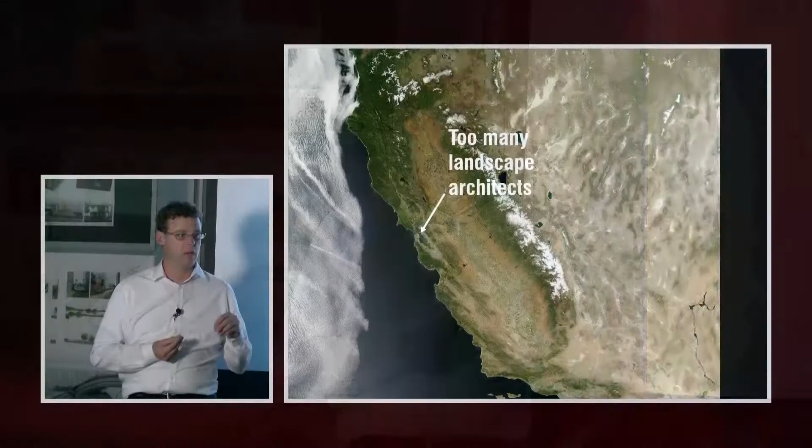I live here, and California is a great big state, but the Bay Area has this over-concentration of landscape architects—probably more than any other metropolitan area in the country, perhaps the world, and I mean that. There's good reasons for that, but it makes it super competitive.

So I had this moment in 2009, maybe 2010. I was teaching at Berkeley. I showed up for a meeting, an RFP meeting for a new park. It was a little one-acre thing, and there were about 50 landscape architects there. There was barely enough room for us in the park. And I looked around and thought, this is not going to work.

You're competing with all of them. How do you tell these guys apart? How do you know what they do? And so that was a moment.

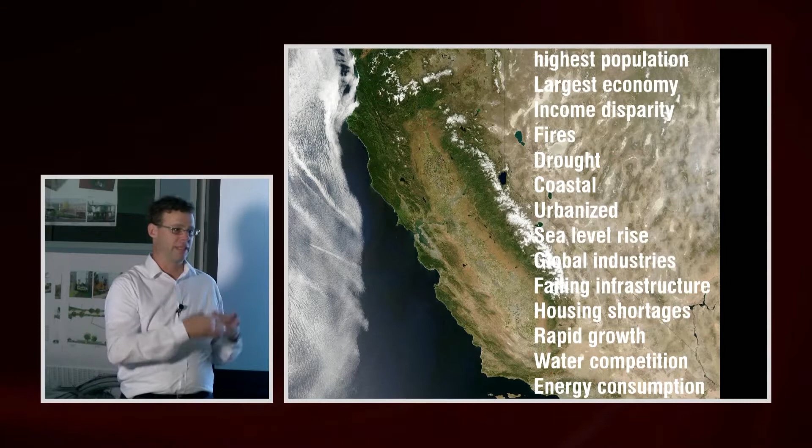California in general is a great place to practice because it's the extreme of everything. It has this doubling effect, and it gets more and more complicated every day. You watch the news and see that, and you think about how it affects spatial planning, design, and the challenges of environment. It really is everywhere, and that's why I say we need really good people and more and better schools.

And so it's at that moment that I started to think about what's the formulation of a firm that's going to have meaning, be effective, attract the challenges, and do work that's advancing and making progress in really difficult conditions while doing interesting things. And so that's where Bionic came from.

The idea is that it has this immediate connotation of something that's alive and something made—we engage in the combination of that every day. It's not about my name, it's about a group or an approach to practice, and there's a certain assertiveness about it. We believe in optimism, in invention, in acting across our boundaries—that was the hypothesis for the kind of firm.

And then with a really simple mandate of enabling life—that was the test, that was our mandate. At the time, it was me, office of one, literally: you start an office with a laptop, a cell phone, and a desk, and then go from there. So that's what I was doing, and at the time I did a bunch of projects that were really just tests.

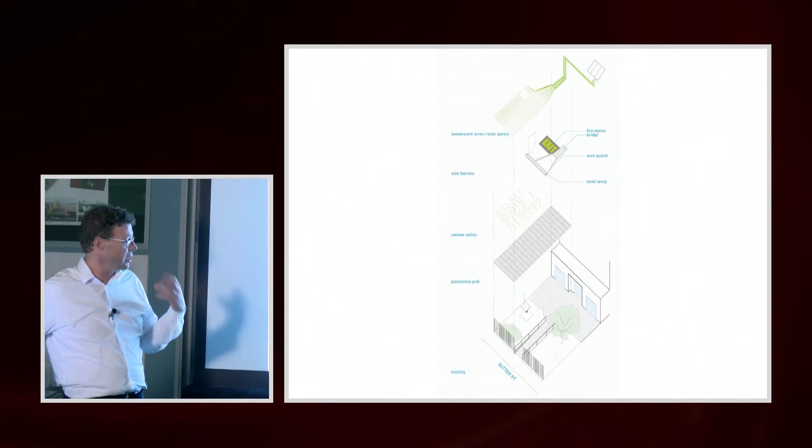This was the first thing I did, for a small art museum located off the street that had a visibility problem. So we designed this glowing terrain that came down off the roof and went over the garden. This is made of stuff landscape architects don't use at all: a 400-watt solar array, phosphor-coated wire, a couple hundred fiberglass rods. It's hooked up to that solar panel, comes down the facade, and that charge makes the wires glow.

This was the first project we did—kind of a visibility project, an unusual sort of sign for this unusual urban space.

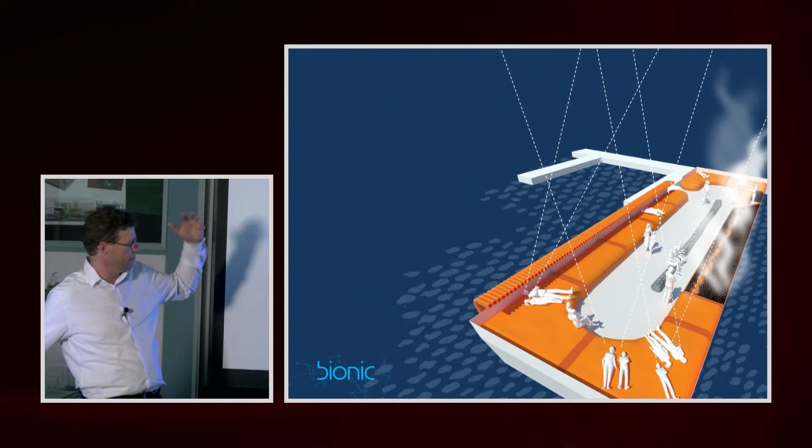This is a competition in Fort Point Channel in Boston, an industrial channel where there's really nothing to see. So this was an idea about making something so you could look up at the sky. It's a combination of a fuel bladder, a log, and a burner—basically a big water bed heated by the fire—and you look up at the sky and see planes landing at Boston's airport.

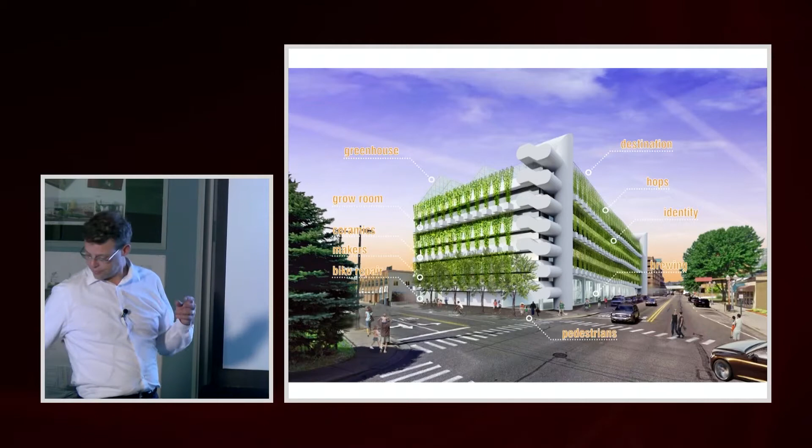This was another one of many competitions I did. This is an exhibition in East Lansing, Michigan, which had a dead downtown. It took all this void space in parking garages and turned it into a hops farm around the outside, occupying the top as a park since it's flat there with no view anywhere.

So this is about reusing old infrastructure and assigning new programs to it.

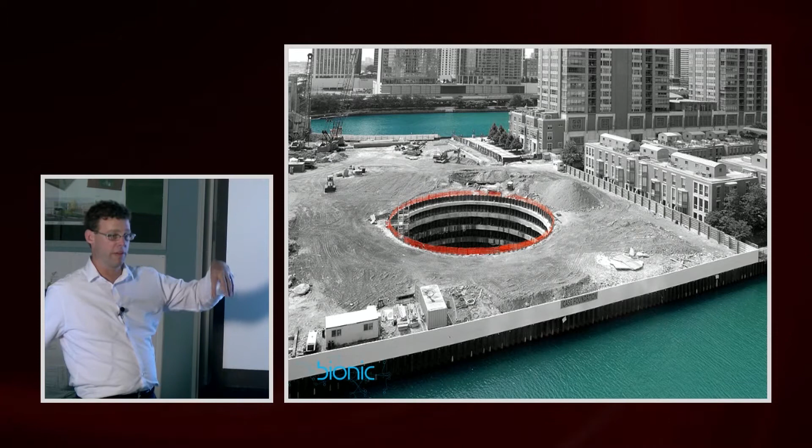This is a competition in Chicago. That right there was supposed to be a mile-high skyscraper by Spanish architect Santiago Calatrava. The financial crash came, and they built this $30 million foundation, but didn't have a project to put on top of it. Super prominent site.

So this is about the transitional use of that site. It was a giant steam ring launcher, taking water out of Lake Michigan and using that big cavity to launch steam rings and make a spectacle, assigning a new purpose to the site. Again, a different kind of adaptation or invention from infrastructure.

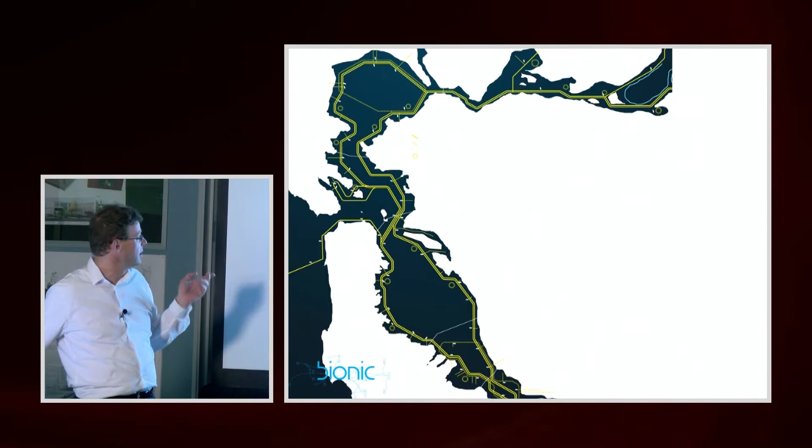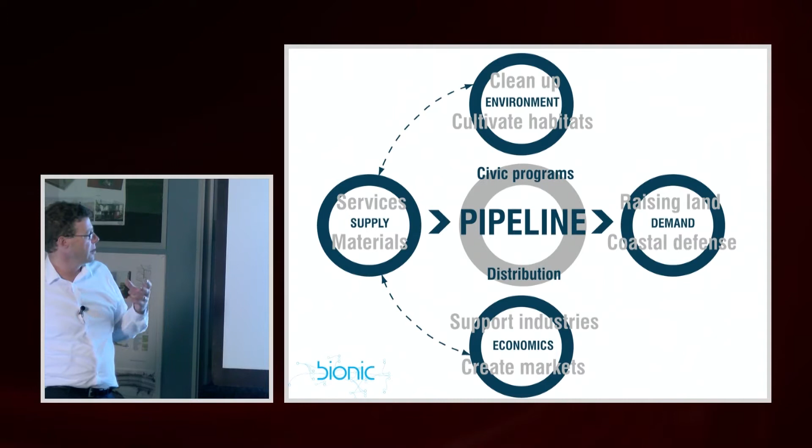This is a competition for San Francisco Bay about using sediment to adapt to sea level rise. It's a very complicated issue, so we were thinking about designing an infrastructure that did more than one thing.

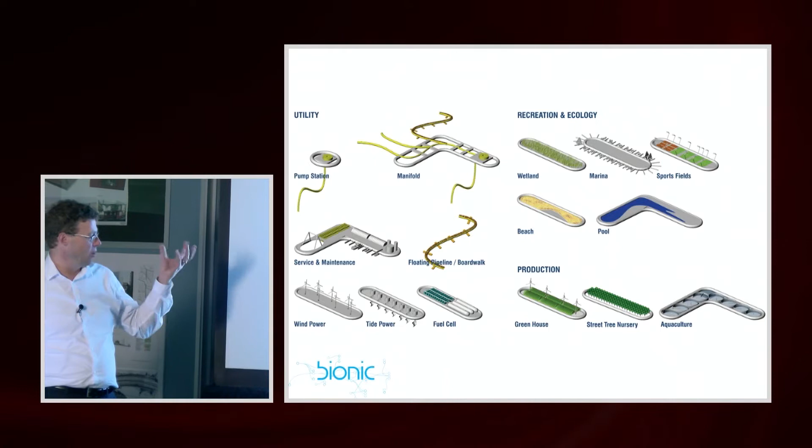It was a pipeline to move sediment, with a whole array of different kinds of apparatuses and purposes on pontoons.

There was a network of islands connected to this pipeline, used for all these functions, really to make the bay, this gigantic regional landscape, adapt over time.

This is more like making a utility for moving mud, but it would have these other functions like disaster response, and it would do the big difficult projects.

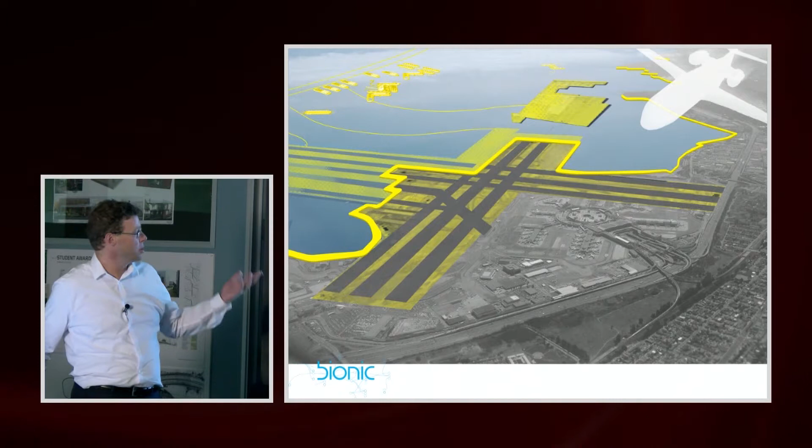What's cool about this is we were speculating on this 8-9 years ago, and today we're in an international competition to do this, and we're thinking about it.

These things take time, I guess, but they have a way of growing in the process. So that's kind of how I started a firm, and it was a good intellectual foundation. It wasn't confused by clients or by financial motivations—it was about testing the thesis or hypothesis of a firm.

Another thing we've done along the way: it's difficult to do something different than what always gets done, right? It's really safe to look and say that's how it was done, so I don't want to risk anything, let's just do it again that way. Maybe we'll change the color.

And we're asking the question—we're seeing the world in a different way and saying that's wrong, that's broken, that needs to be better, it needs to be bigger, and we have to persuade people to see it and think differently.

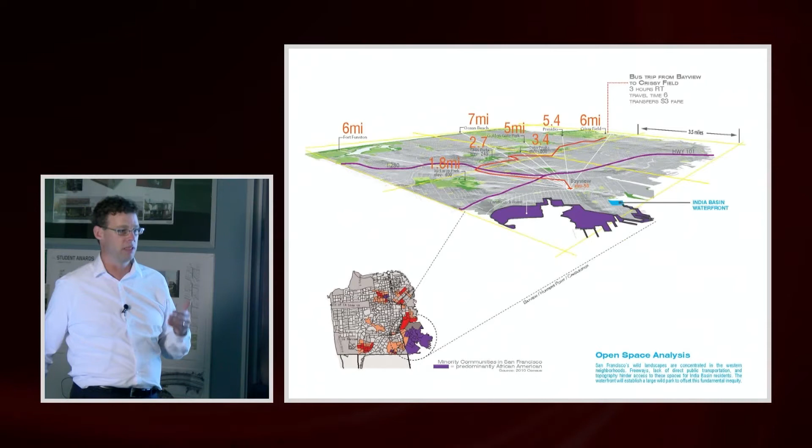As a firm, we've developed a whole set of data methods, and I won't go into it, but it has a lot to do with measuring and seeing things, making an empirical case, and then converting that to design opportunity.

These veer into all sorts of different territory that isn't typical for landscape architects. Here's economic strategies—this is about gathering and harvesting materials from other infrastructure projects so that you could build a big public park in this particular case.

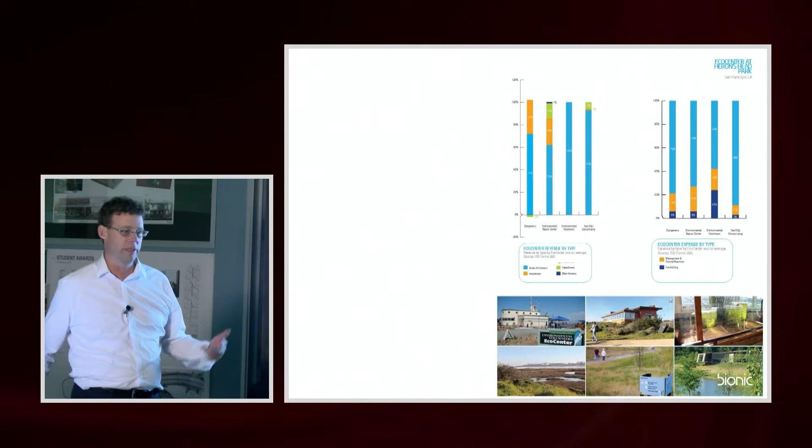We have a whole arsenal of information, branding, and identity efforts we've done. We conduct research—this is for environmental centers all on the West Coast, looking at their data and economics, pulling their tax returns to make a case for what eco centers should be.

This is about going out and measuring, surveying, and talking to people in order to define the form of a wall. And this is work we've done at Fort Mason Center, developing a program for this arts and culture complex—not too far away from here.

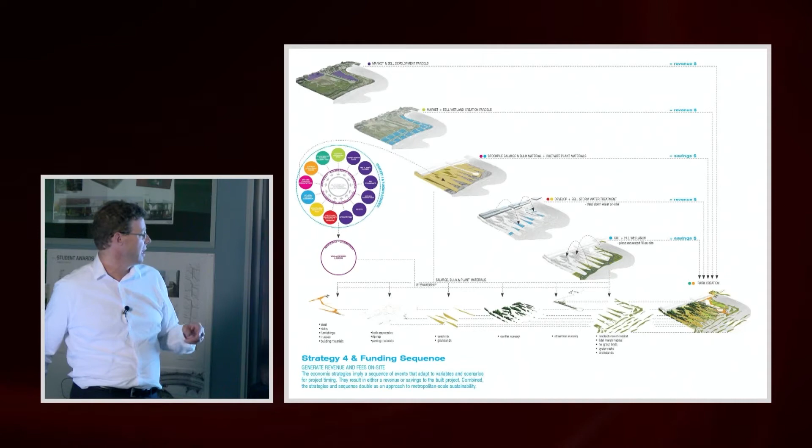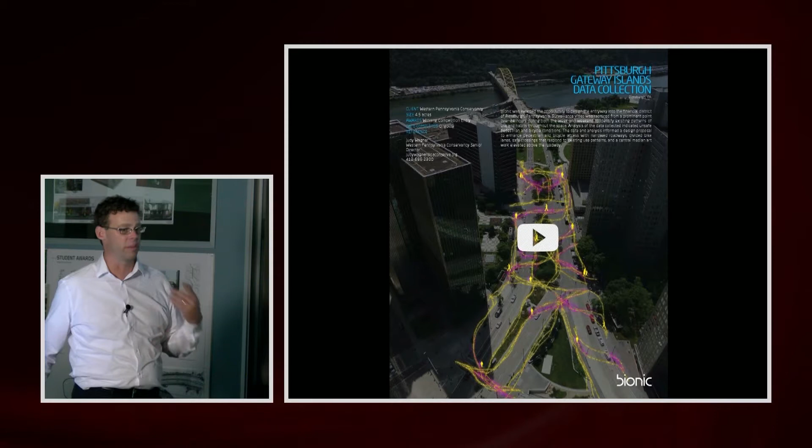So we have a whole set of data methods, and this is time-lapse tracking of pedestrian behavior. We use this for building a base case, a logic for a design departure. It's an important tool, or maybe just a way of thinking about what we're seeing to be more persuasive.

This will just go kind of small to large.

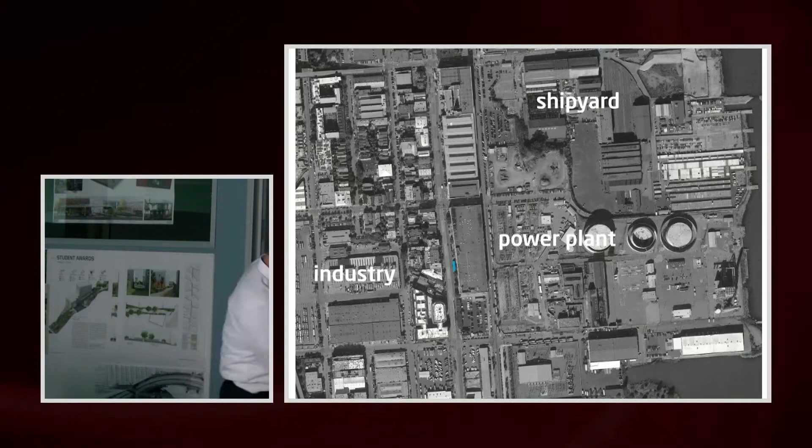That small museum I talked about, the first commission, well they moved to a different place, to Dogpatch, a post-industrial neighborhood where the blocks are 600 feet long, and they're trying to get visibility. So they talked to us about this, here they are right in the middle of a 600-foot long block, and a train zips by. They're trying to get people to come back, so trains and cars zoom by, the train station's down here. So the object is to get people to come back and check out the museum.

So we designed a public space, I don't even like to call it a parklet. This is 3 parking spaces, about $160,000 in 3 parking spaces, and it's designed to have 2 personalities.

So one side has this faceted wall that changes colors, meant to engage the kinetic energy of these machines zipping by on the street. From one side it's white, then the other side flips and turns green, that's what you see from the vehicular experience. From the pedestrian side, it's a tricked out big piece of urban furniture.

So it's got planting, adjustable stools, ADA spaces for wheelchairs, a foot rail, an armrest and a place for your $6 latte, and it's got symbols even encoded in it, like that chevron. You're not supposed to advertise on parklets, but that chevron is pointing you to the gift shop right there, so you can see it from like 200 feet down the street.

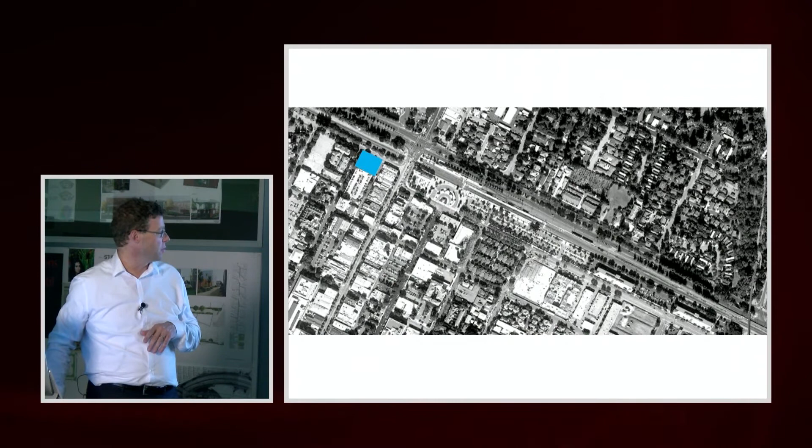It's got lighting, so it's making a public space in a very narrow sliver, and it's part of a big urban system. It's been out there a couple of years, works really well, and at night it lights up. It's got nano coatings to help with graffiti.

This is in Mountain View, downtown Mountain View, right next to a train station, and this is a 16,000 square foot living roof. The setup for this is that it was built at a time when nobody was building anything, and this developer needed to do everything, from lot line to lot line construction.

So the roof is an amenity space. It treats stormwater, has a whole composition of plants with seasonal dynamics, catches the wind, is very animated, and contributes to a mosaic of urban habitats.

I think this project moved incredibly fast, it was done during the recession, one of the first projects that we built, and it adds a tremendous amount of value to this place. One of the coolest things about it is that you can see the Zeppelin hangar at Moffett Airfield, which is one of my favorite buildings, right there.

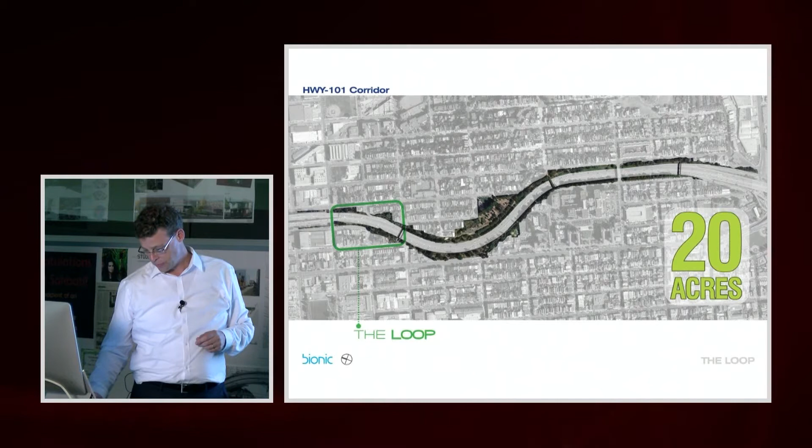One of the other things we've done as an office is, we couldn't find the projects we wanted to work on, so we tried to make them ourselves and make them real. This is one of these.

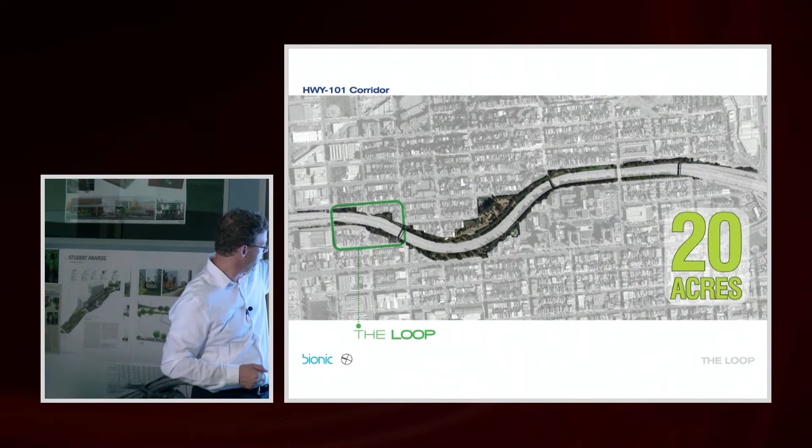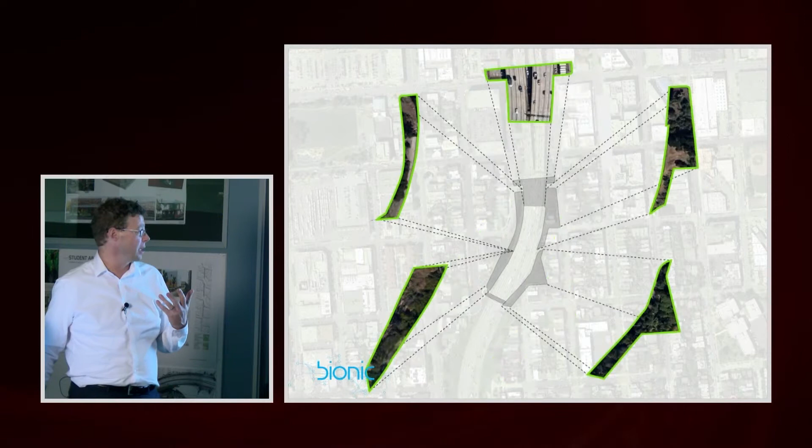So we started this project at a concerned neighbor's dining room table—she made us cookies and we talked about it. We helped them design a project, and the basic idea was that there's all these little patches, so we'd link them up and make a place out of it.

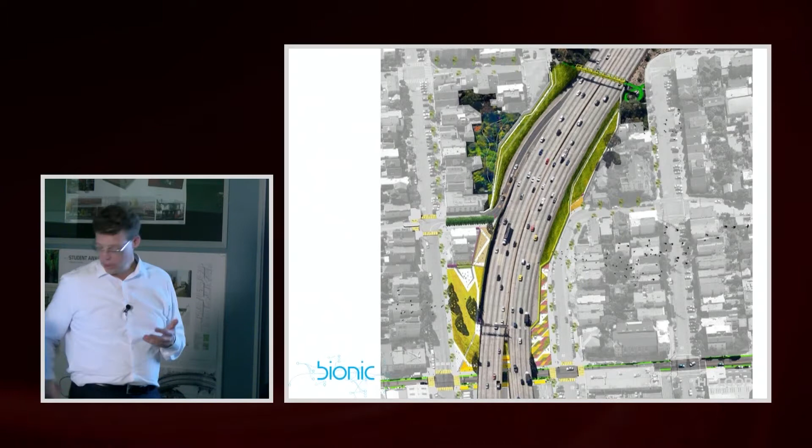This is something we all hate and need at the same time. So it's a very three-dimensional place, with all these different conditions above, under, over, and around a freeway. We generated renderings and helped them for years.

About a year ago, we got to a point where we helped them raise a couple million dollars, and now we're designing the first phase of it. So you start small, with ideas, and it's through our own ambition—putting ideas out there and visualizing them, helping people understand them—that motivates people, creates funding, and makes things happen.

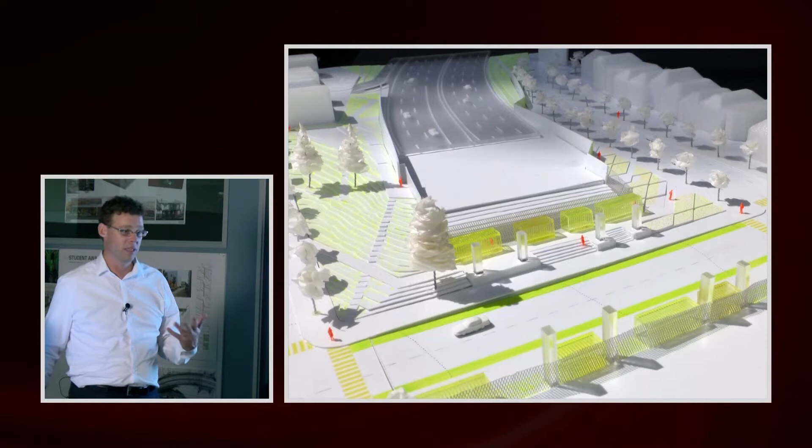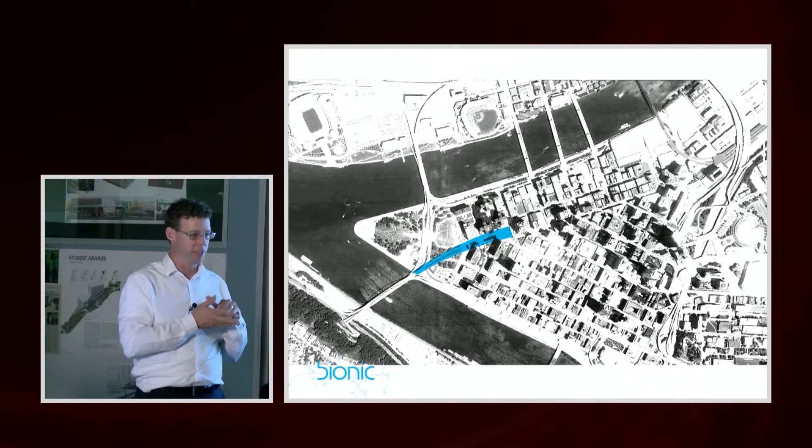If you were to put that project out on the street in San Francisco and say, here's a project under a freeway and it's funded, you'd get all 50 of those landscape architects I saw in that park five years before—them and more would show up. But through initiative, and developing a project a different way, we've been able to create opportunities for ourselves.

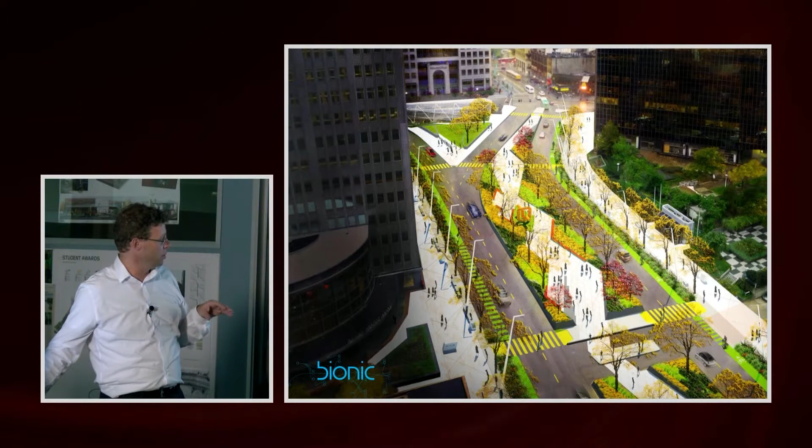We have an urban design portfolio as well. This is in Pittsburgh, Pennsylvania—we won this in a competition. This is a new entry into their downtown. Pittsburgh's a cool place, with a really interesting industrial past, but it's a Rust Belt city that was divested, with a lot of neglected maintenance.

So this is a project about reoccupying a part of a city that's dominated by cars and benign neglect. It's a 21st century street—street wall to street wall redesign, new water systems, bike lanes, a sculpture walk. It's designed for events, with a greater degree of comfort and furnishings, so it's used in more times of the year.

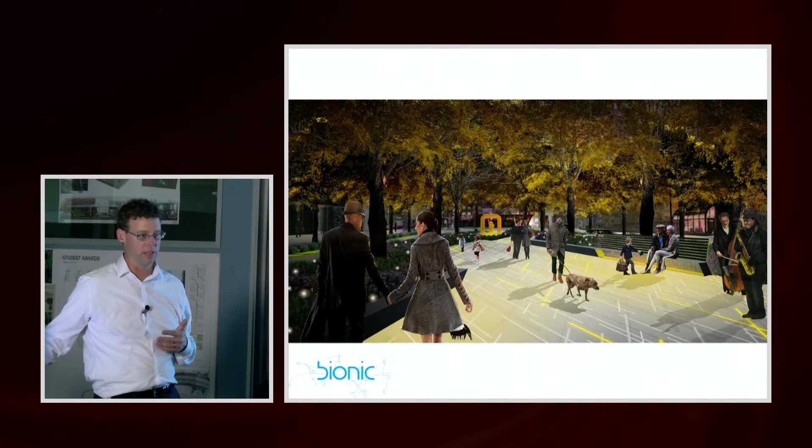This kind of work of redesigning space that was designed around vehicles—we see it more and more. It's actually a really good expertise to develop and think creatively about.

For about 10 years now, I've been working in Malibu, California, to design the coastal access system, and this is a really unusual context. Most people, when they think of Malibu, have this dreamy idea of it—about celebrities and fame, this kind of life that's just out of reach, dangled in front of all of us. I see it in a really different way, because behind all of this there's a kind of excess and greediness. It's not about financial greed, it's about greediness for a resource—the Pacific Ocean.

The erosion in Malibu is pretty extreme because people have built right up to the water. They have these kind of rent-a-cops that ride around. They have no authority, they just chase people off the beaches. Most of Malibu is on septic, which means that you know what goes where, and the water actually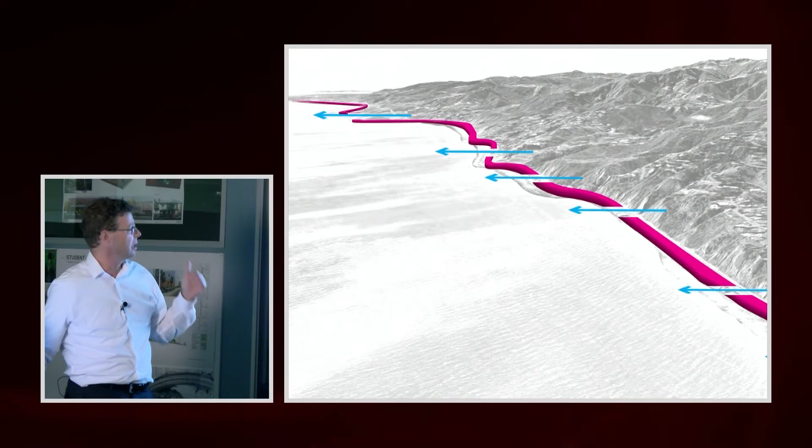So we're doing 8 of these projects. I'll just show you a couple of them. You can't make this stuff up. Truth really is stranger than fiction here.

So this project is 5 feet wide, about 60 feet long, about 15 feet deep. It sits right between these 2 houses, and this guy put his hot tub equipment and his stair there, and it's a public access easement. They've been in lawsuit for 9 years, I think.

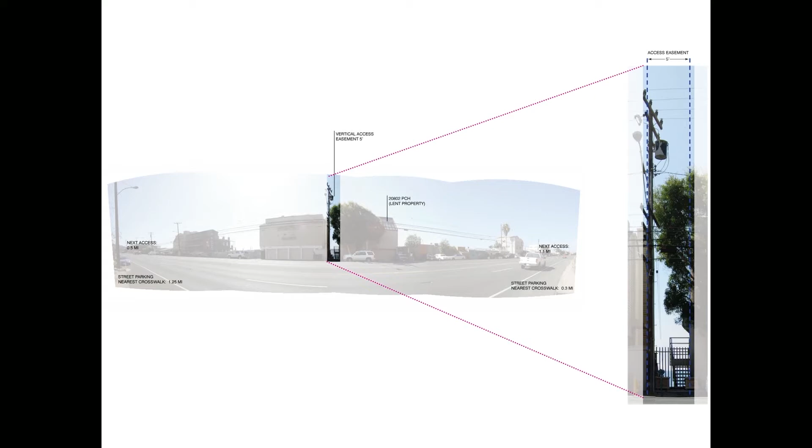He's now into a period where he's getting fined. He was getting fined on a daily basis, $4,000 a day is the fine for it. Litigation for people in Malibu is just kind of like part of the cost of owning a home.

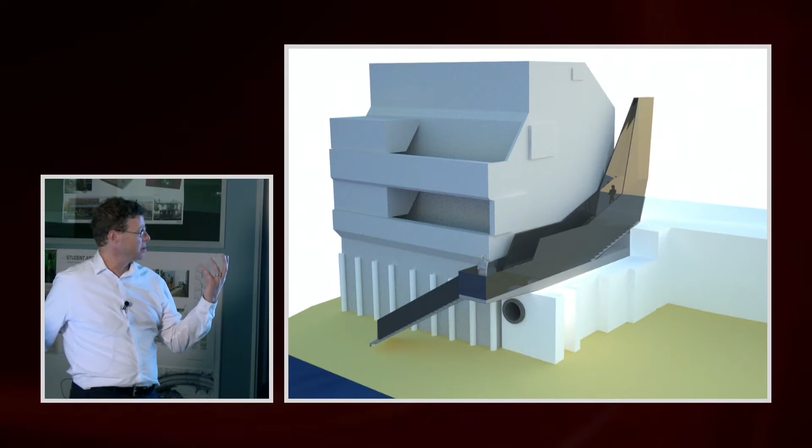So we've been designing this access point so that you can actually find this little sliver. It's kind of designed, polished stainless steel for a marine environment. It sticks out just enough. It's really different from what's around it. And it kind of has this kaleidoscope encounter with the ocean. All this is for is just visual access to get out to the end.

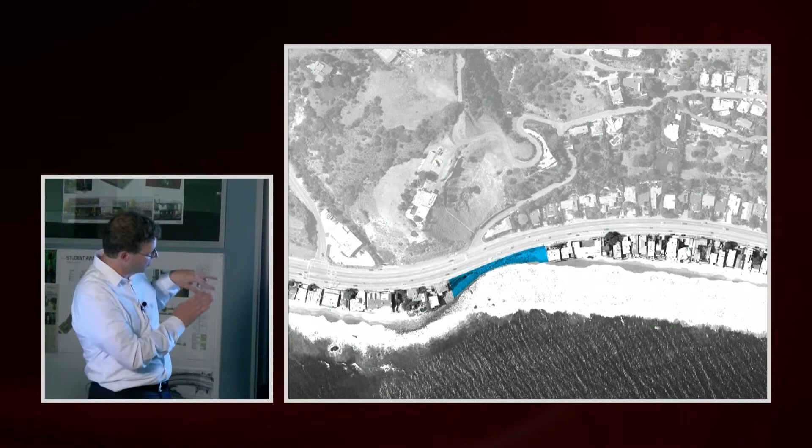This is a little further down on the beach. That's about $1.5 million of land, and a guy bought it basically as a reparation for putting his tennis court on another easement. So there's just extreme audacity.

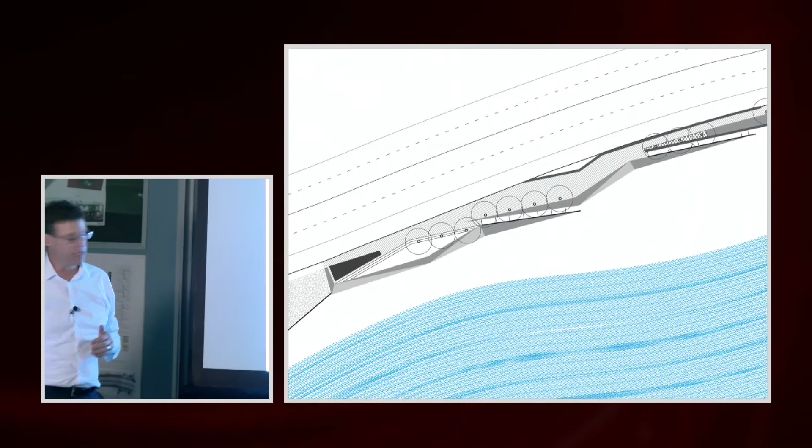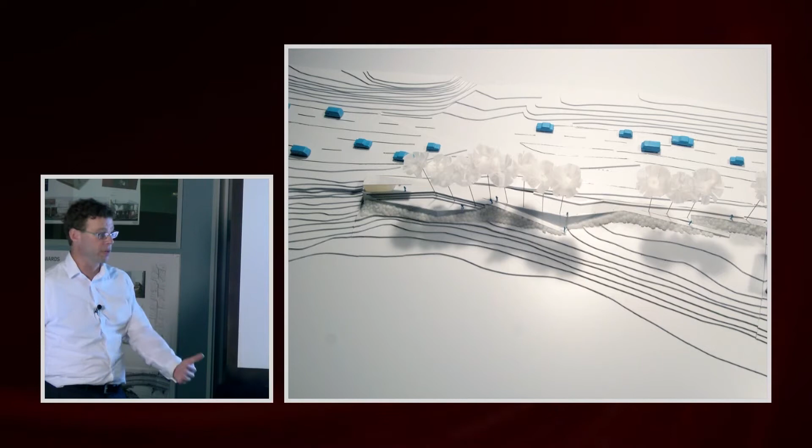Our clients call this the Millionaires versus Billionaires project, because what happens is the millionaires live up here on the hill, and the billionaires live there, and they don't want people to come to the beach. So this will be like beach access for several miles, and it's designed to be a seawall replacement, or a seawall, and it's protecting really important infrastructure that runs under the freeway. It's got a pretty complex section designed into it, or things like this. That's a wave return. And the whole thing just has a very big sculptural quality to it.

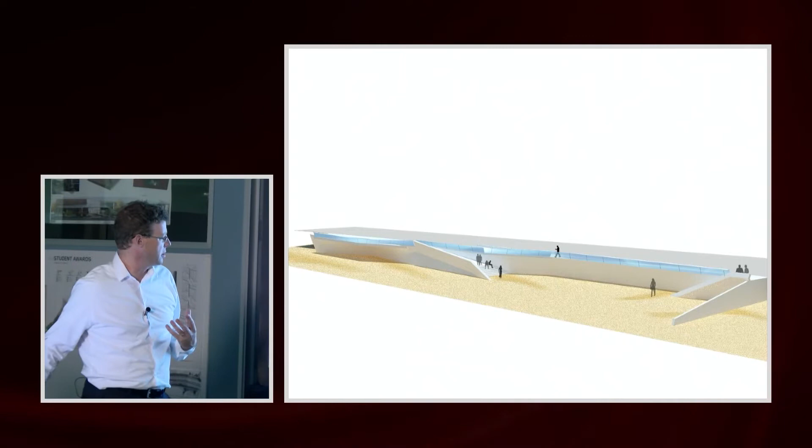It's in a really dynamic setting where, in a storm, 6-7 feet of material can be deposited. So a storm can go by, and then the bottom stair could be over here. So really extreme conditions. There's several more of those, and they're all really different and have totally weird stories.

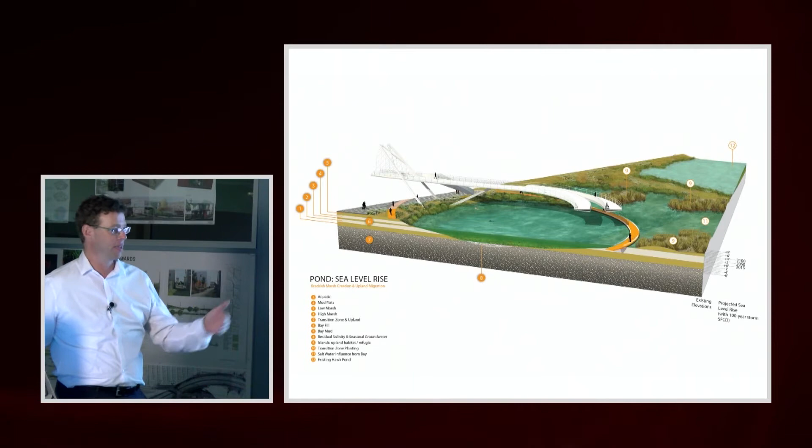So again, started something, an idea in a competition, and learned something about mud and sediment, and several years later it shows up in a competition about a bridge in the Baylands.

This is a different kind of infrastructure project. This is a solar project, and this is about putting a solar array in a freeway corridor.

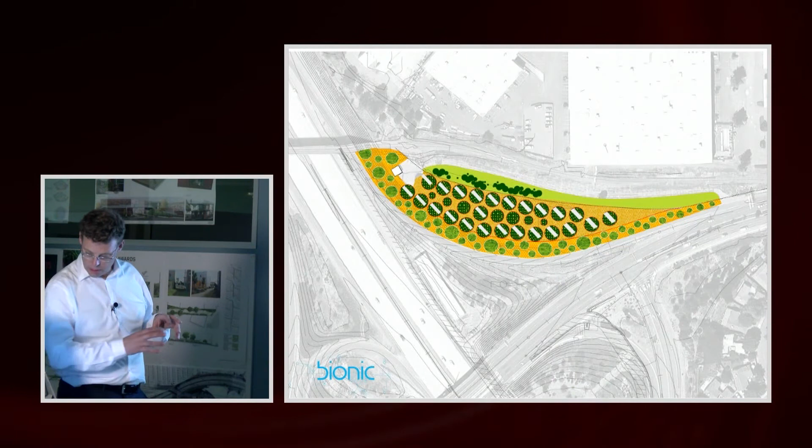The technology is called CPV, concentrated photovoltaic, and basically it has sun tracking technology in it, so it takes a smaller footprint than your basic fixed panel array.

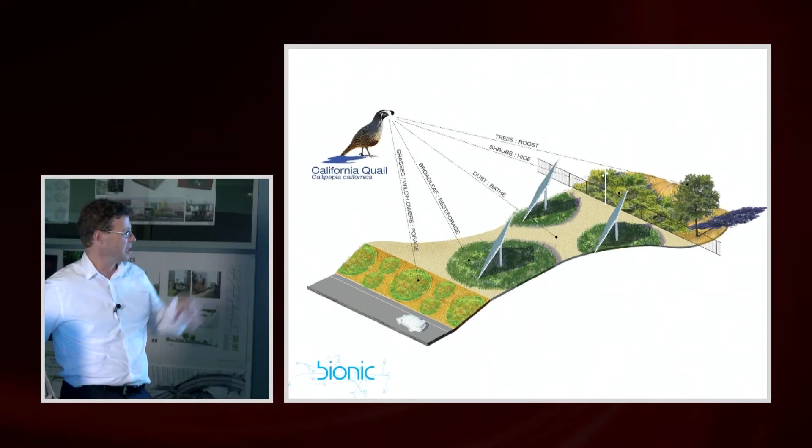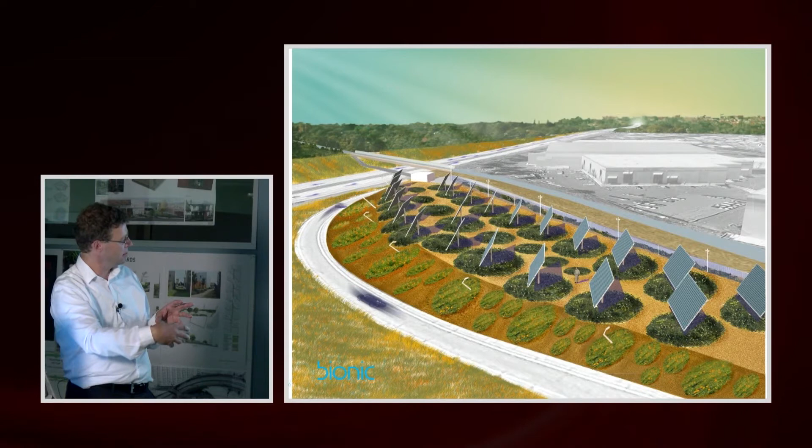The interesting thing about this technology is it actually works oddly well with the habitat needs of California quail. They don't want people around them, they want to be kind of separated and fenced off, but you need access for infrastructure or to maintain them. So this was a photovoltaic array and a California quail habitat, kind of an odd combination, but it works really well.

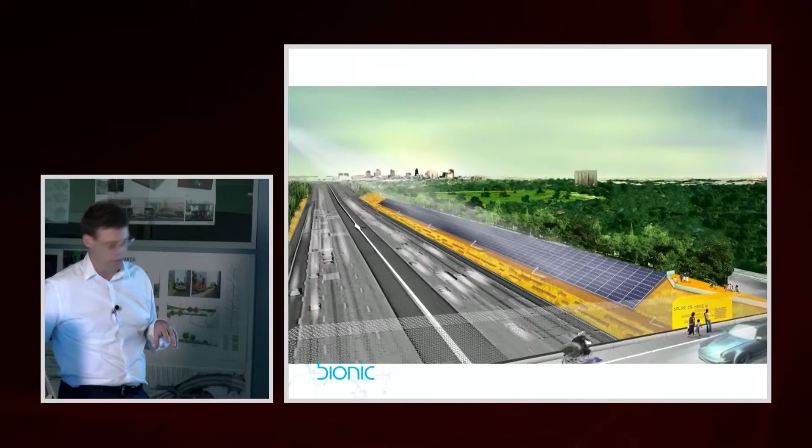And then this is a linear version, which is on a cut slope, and this had a whole public information piece to it about solar energy being generated locally, not from someplace far, far away.

We've in the past couple of years been building more, and this was a project that we started for Google. And then right in the middle of that, Google sold the whole thing to LinkedIn. And then right after that, LinkedIn got bought by Microsoft for $26 billion. Crazy set of events. But to design a project that goes from one client to another client to another owner makes for a really fast-paced work environment.

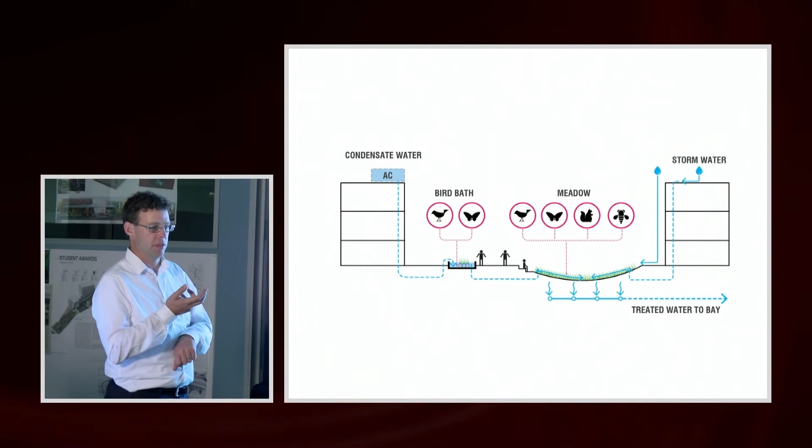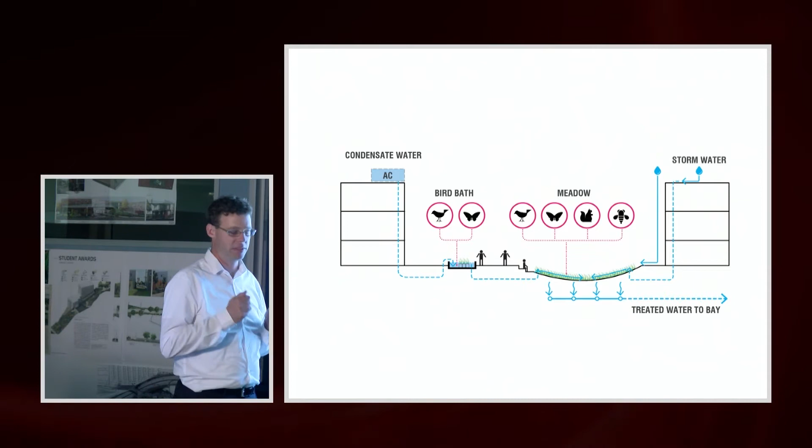We're in meetings with architects all the time, and they spend an unbelievable amount of time talking about stuff that you just don't care about. But if you listen closely, it's not interesting.

You chose the right field. Being an architect's kind of boring.

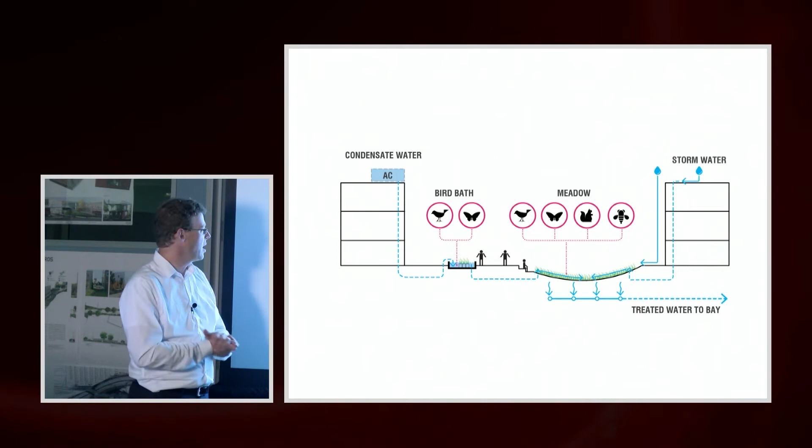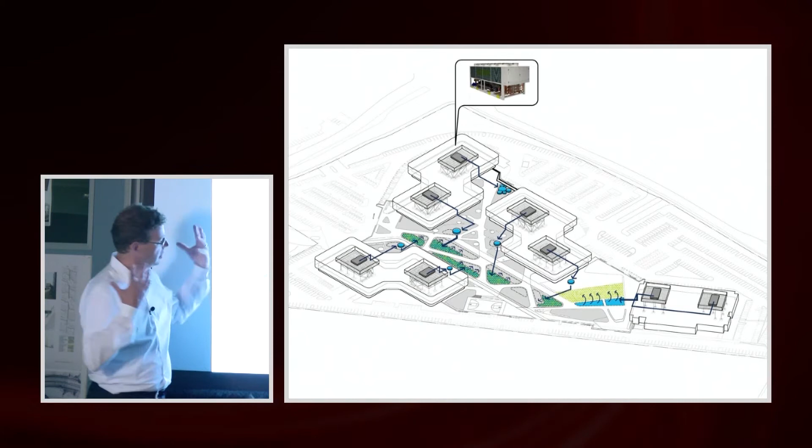It really is. Anyway, they talk about air conditioners a lot, and I'm interested in air conditioners. I actually did a competition about air conditioners, so I knew a little something about them. They spent $10 million doing structural upgrades for the air handling units in all these buildings, because the tech world is crazy about air quality—these buildings are horrible places to be in. They don't have operable windows and so on. So, $10 million on air conditioners and structural upgrades, and they produce a condensate stream.

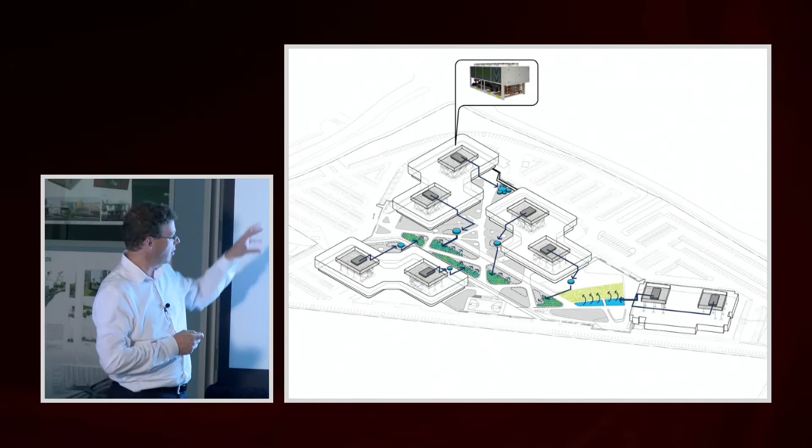The condensate stream is kind of the inverse of our hydrograph in California. We have wet winters and dry summers, and air conditioners have dry winters and wet summers. All of these air conditioners probably produce about 5,000 gallons a day in the summer, and it goes down to these basins, which are precast concrete troughs like you'd see for watering cattle. All the condensate goes into those, and then we irrigate from those basins in the meadow. So all of this is really living, and it's got this very dependent relationship with air conditioners.

I love that. I'm just going to flip through this stuff—it's got a lot of cool details. It looks great at night. But the air conditioners are really the most interesting thing about it, I think.

The other thing I'd say about it is most campuses try to put a wall around it. This one is open, so it's like a Silicon Valley mega block, but if you're a pedestrian, you can take a shortcut, walk through here, and you're walking through something really unexpected. There's a whole information and educational part of it too.

Rewind again back to when there's nothing going on. The art museum I helped out with this little installation also helped curate an art fair at Fort Mason Center, and they needed a sculpture garden. So we helped them make one—this is in the festival pavilion.

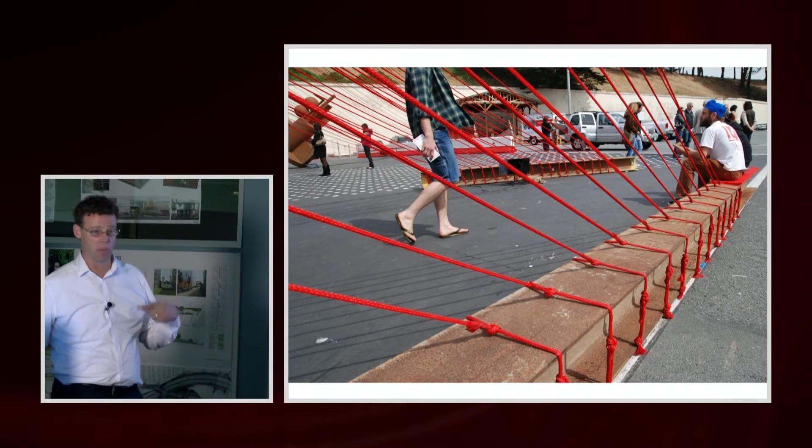It went up—took 3 months to design, was installed in 3 days, was up for 3 days, and took about 3 hours to uninstall. So it was very purpose built, not so much for what it looked like, but for what it had to do, for a cultural event. It was really fun—I like to make things.

I was interested in doing installation work because I like to see things materialize rather than just looking at them on paper. Fast forward 5 years later, after this little installation in the corner at Fort Mason Center, an arts and culture complex on San Francisco's waterfront—there was a competition, and we teamed with a Dutch firm called West 8, and we won.

It's a competition about turning a parking lot into a public realm. It's got an arts and culture complex—the Art Institute just went into that middle building. But it's designed to keep people out, not welcome people in, so it's a very constricting context: a National Historic District in a national park.

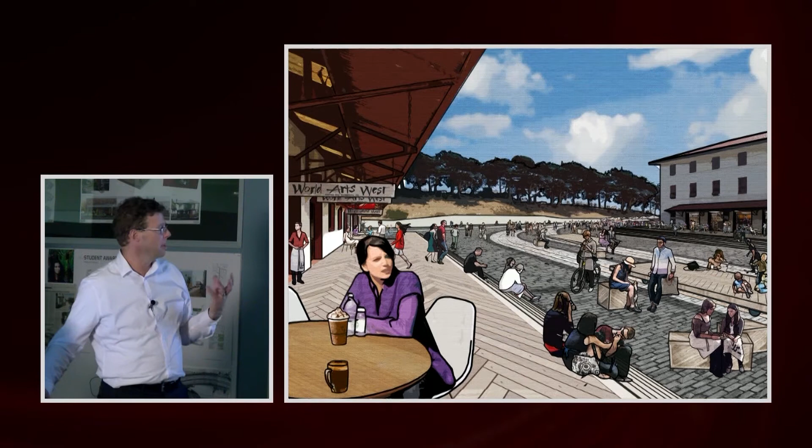For 6 years I've been working on this. We're going into design development now, and I've spent the past 5 months arguing about a curb. I'm not joking—it takes fortitude. But what we're trying to do is simple things: make these buildings more human, bring people back into this space, really highlight the track system. All of Fort Mason Center is basically like a big machine for bringing materials in to load onto ships.

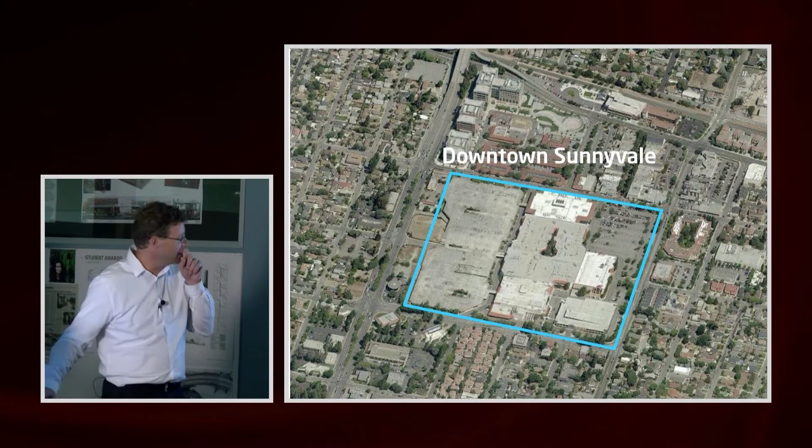How are we doing on time? About 10 minutes until we should wrap up.

I'll do this quickly. This is where I came from. In Sunnyvale, we're doing an urban design for 6 square blocks. See these trees right here? 1, 2, 3, 4, that's 4. It's surrounded by a shopping mall, Macy's right there. This was about 10 years ago.

Retail's failing right now, and enormous tracts of land used for consumption and cars are shifting and changing. And so this Sunnyvale has a donut hole. They've got a big city, right, with nothing in the middle now.

So we're working with a whole team of architects and developers to redesign this and to make a public realm. But to make it someplace with real vitality, you have to start with the basics. So we've been talking to a whole group of people with really different backgrounds about making a full neighborhood, and what that means to make a complete neighborhood. A big part of it was just thinking through scenarios of what people would do every day, and what makes good experiences versus just buying stuff.

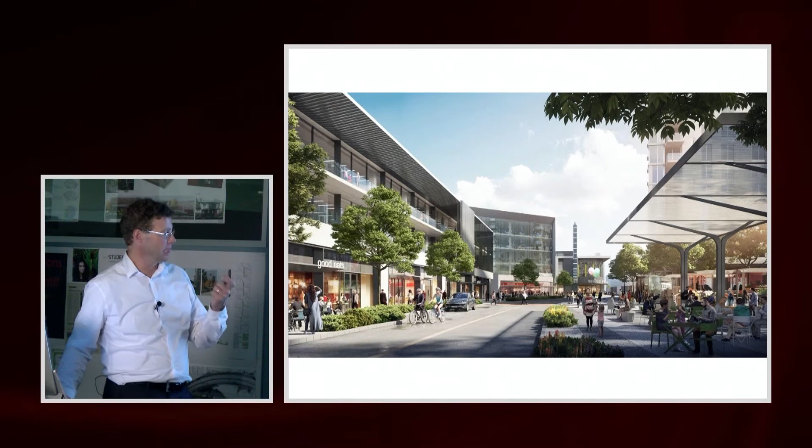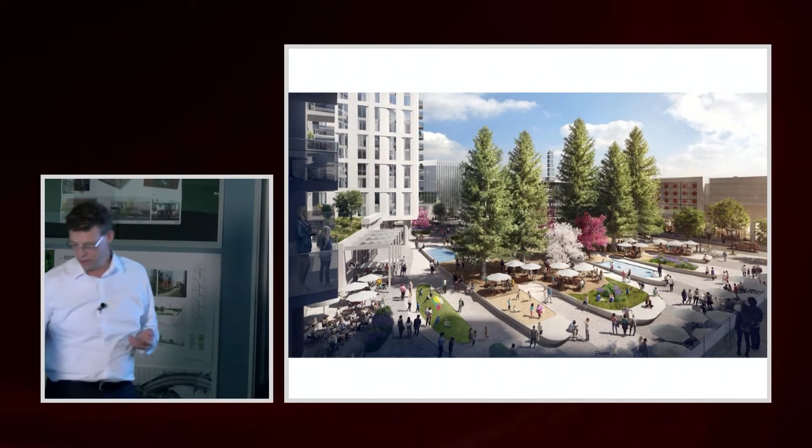And then we've been leading the design of all the public realm, making this new linear park. It turns a corner and comes around, and those 4 trees that were in the middle of that shopping mall are now the centerpiece of this big public landscape. It's meant to be this kind of unusual object that you interact with, and it could be for adults or for kids to play on. It's very open to interpretation, kind of like a huge piece of furniture.

I want to go through this quickly. One of the things I did early in my career was work for a nonprofit, the Sierra Club, to help address some urban design issues out here at Hunters Point Shipyard.

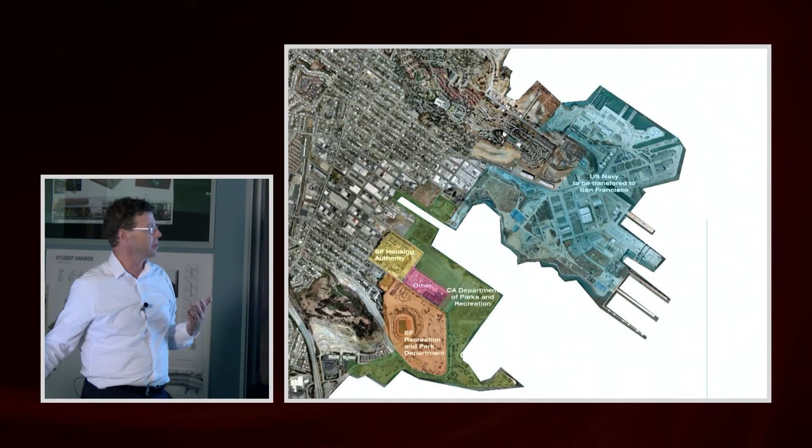In the process of doing that, I kind of poked the biggest developer in town and challenged the notion of the development they were doing. It was with drawings like this and talking about how much it takes in bus fare to get from one side of the city to the other. It was a big, elaborate logic about building a landscape, a big landscape like the ones the rest of the city enjoy, in Bayview.

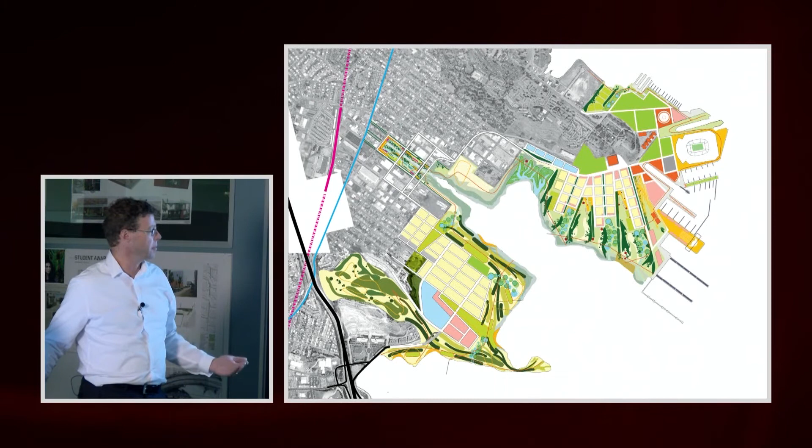It was interesting work on a larger scale, and it didn't make me a lot of friends, but I thought we were saying and doing the right thing. Several years later, I learned a lot about that part of the city by studying it and doing a project there. Many years later, after looking at this site for a long time, a developer bought it. I had lunch with him, told him about that project, and I got an email saying the kickoff meeting is next week.

So we started working on this project called India Basin. Super cool, 20-something acres of bay fill, with wetlands and dunes down at the water's edge. A big, kind of feral, funky site.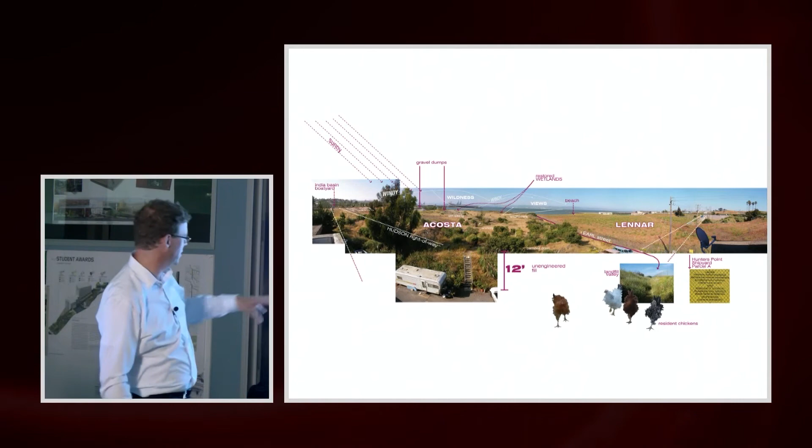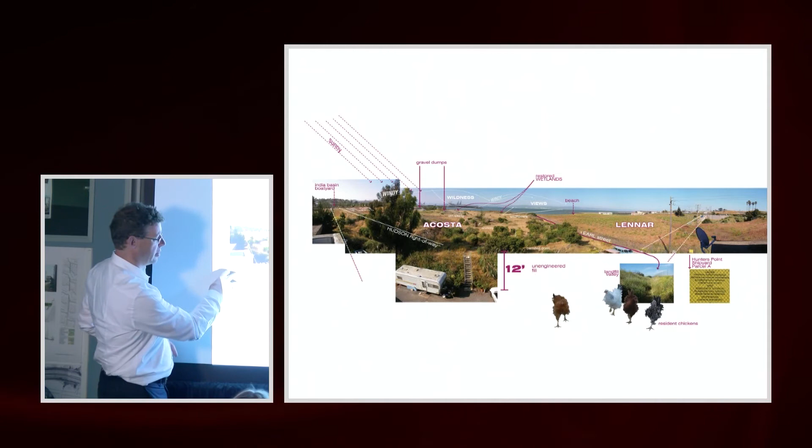It's just stranger than you can even make up. There's a guy that lives here, so the bay's out here. The bay used to come all the way back here, and right here there's this giant house, a barn, that used to be a boat barn. They would build the boats here and launch them right out the back door. The guy that lives there now has a sheep and a bunch of chickens, and San Francisco Magazine wrote a whole story about him.

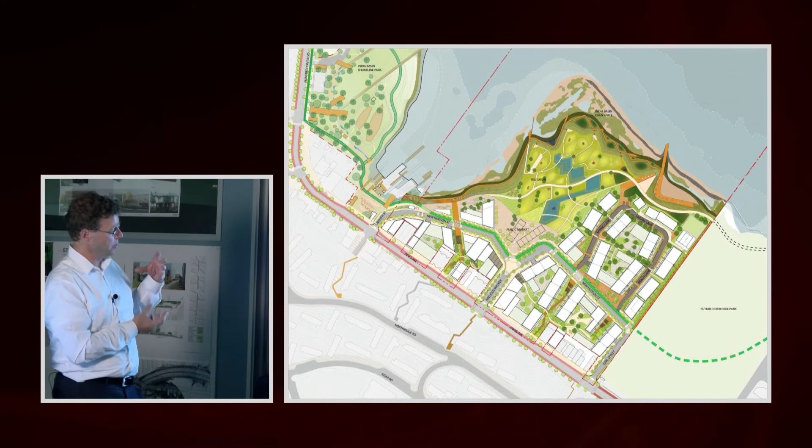So it's got this kind of wildness, on the edge out there, but it has the same problem, there's nothing out there that makes a neighborhood. This is 4 years of work with a team of architects and urban designers. This will be a new San Francisco neighborhood, breaking down one of these big industrial blocks into something much more pedestrian and walkable. It's going to have 1,100 units of housing, shared streets, and a big park.

All the stormwater will be in a decentralized system, so it won't go to the Southeast Treatment Plant. It'll be managed and released to the bay.

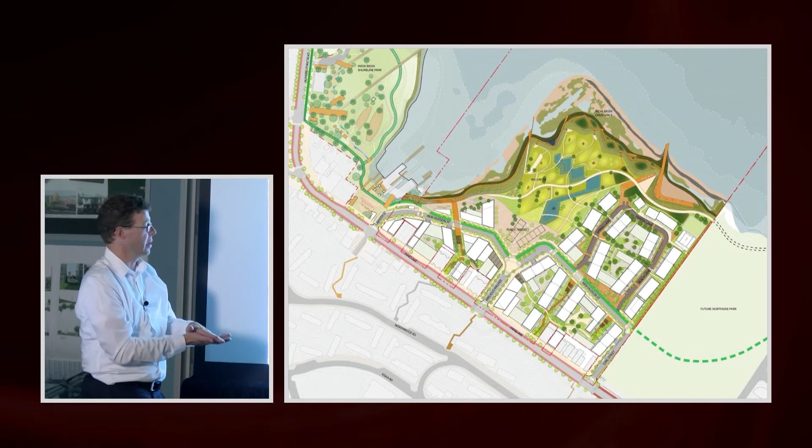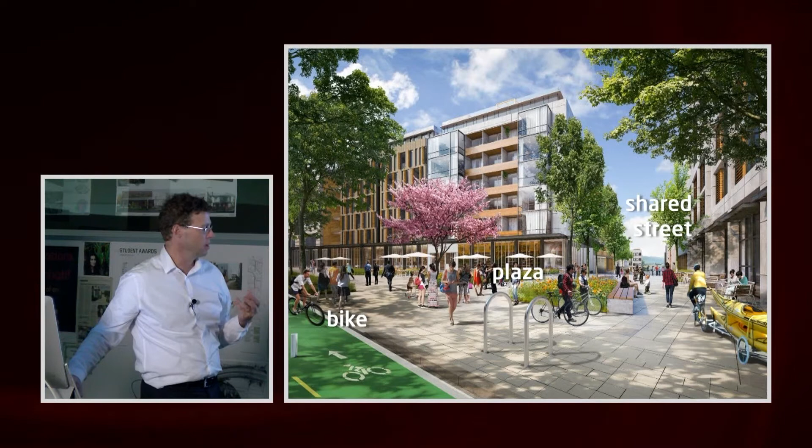Big waterfront—it's really got one of everything, and the character of it is very carefully considered. It's about making a compact urban village in a place where there's really nothing right now. And it's poignant because we're in a time where housing is in high demand, and the tendency would just be to make more, not to do it thoughtfully. But this is incredibly thoughtful about the way it's scaled and sensitive to the neighborhood, and retains a lot of the qualities that people like so much about it.

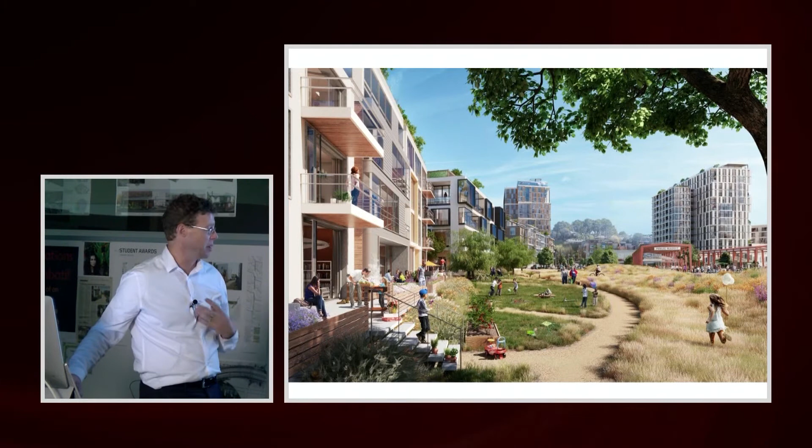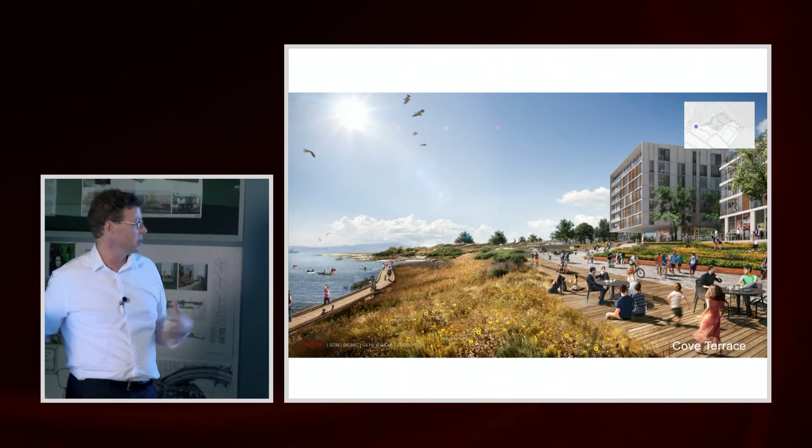I'm just showing you the images that came out of the process, and I won't talk about them too much. What I think is really interesting is the edge, because this is a place that's changing rapidly, and the bay is going to change. So a big part of our work has been designing this park, repositioning it from a post-industrial thing to having a new set of ecological and social relationships to both the bay and the people around it. There's programming about how people will use it and move through it, a sculpture program, a big stormwater wetland, and choreographing use and its inevitable popularity.

I'm going to tell you guys something quickly—this is from a comment set, so the next slides have some of our clients' comments pasted on there, but I didn't have time to delete them. Anyway—

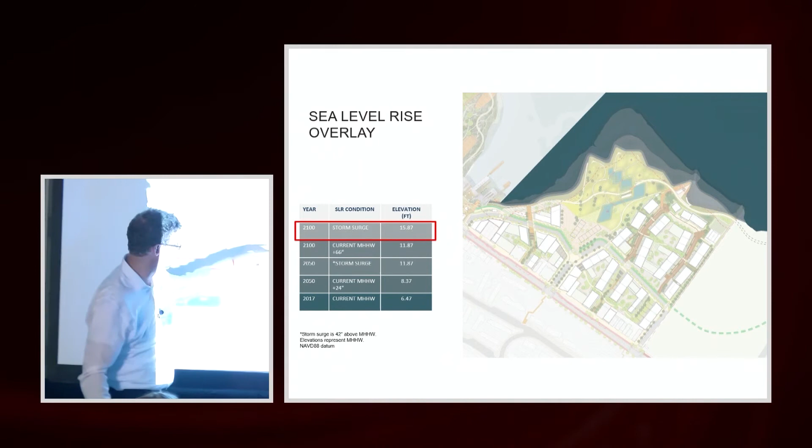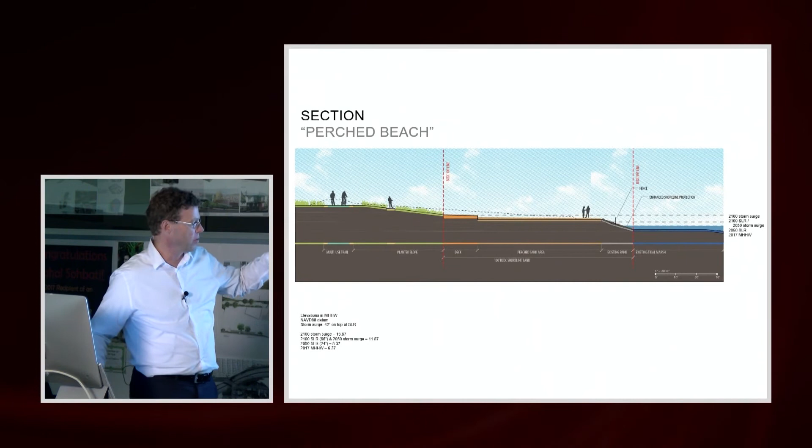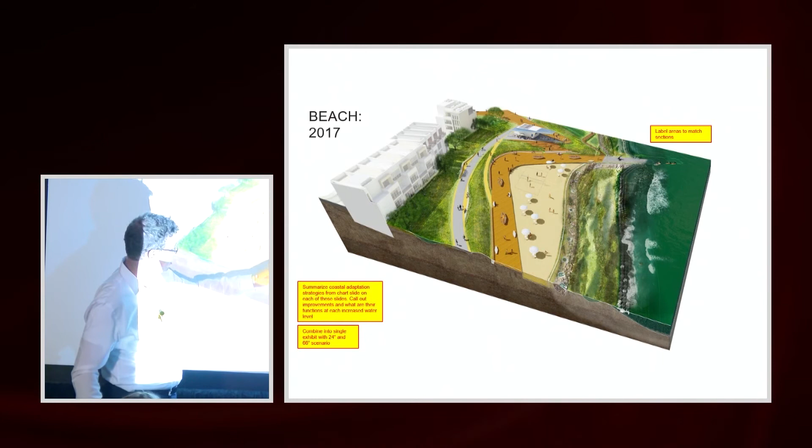So each of these pieces of the Bay Edge, we're thinking about how it's used now. This is a section of how it's used now, and then we're doing things like building this out of concrete that will be friendly to marine life. You'll see how over time these things adapt, and the facilities will still stay useful and in operation, and they'll still serve a lot of their habitat functions.

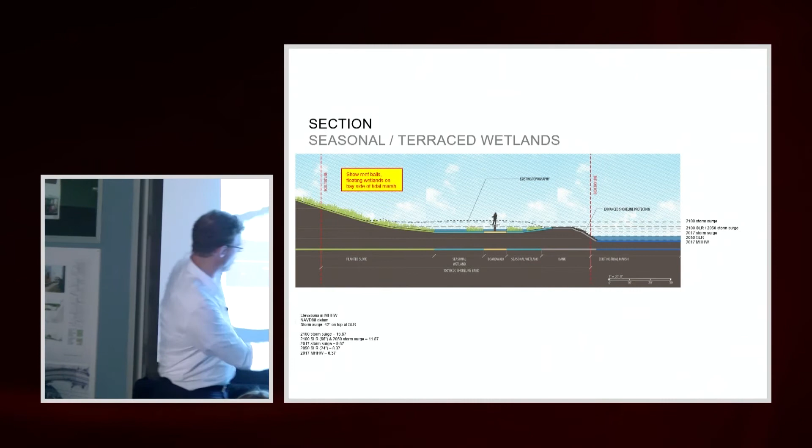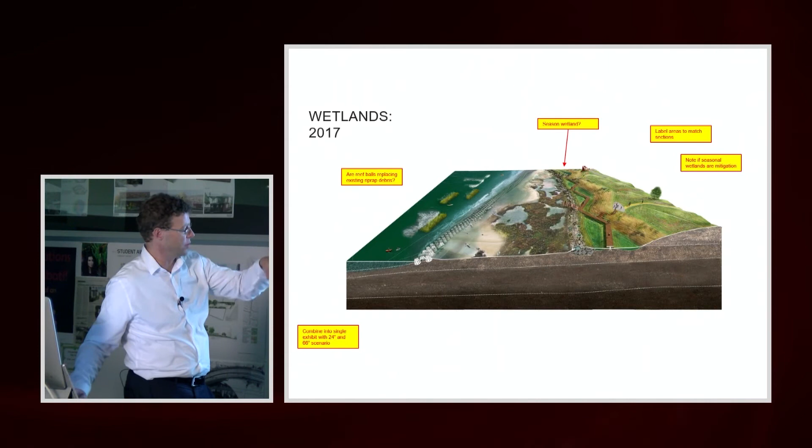Here, right now the existing topography comes to like this. We're actually carving that down to make a space between the top of the bank and the water—it's kind of like a third space—and then putting seasonal wetlands there. These seasonal wetlands will start as freshwater, and then as sea level rises, they'll adapt to become salt marsh retreat, and then in places for retreating salt marsh.

I'm going to stop there. I just want to say one last thing. You got a good snapshot of what we're doing, and I told you about the kind of day I'm having. One of the things I think about all the time is how much I enjoyed being a student, and I'm totally envious of where all of you are, and whoever's watching, wherever they are. That time when you're a student is so great—you have this moment where you can completely focus on your own ideas. It's so indulgent, and you have this opportunity to be around super smart people and lots of great resources, and you get your head wired right, and then you go out and do something with it. So in a sick kind of way, I wish I was going to leave from here and go back to my desk and build a model or something like that. So anyway, thank you.